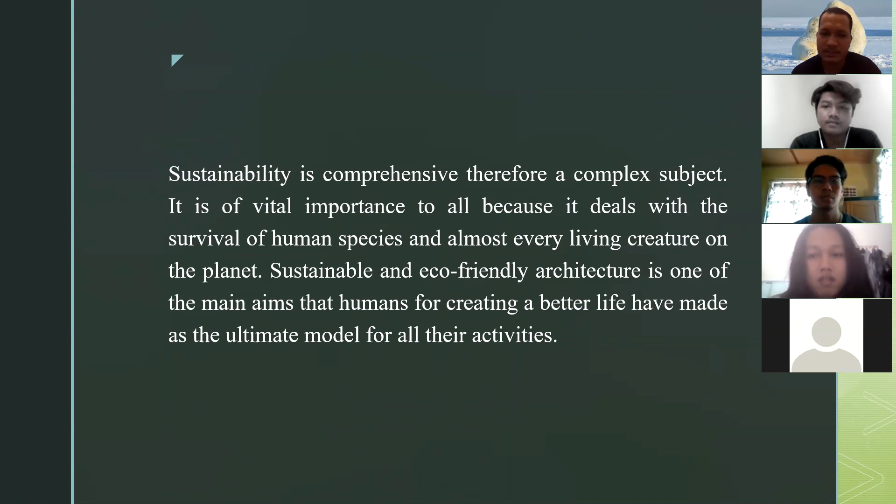Green architecture defines an understanding of environment-friendly architecture. First, ventilation system designed for efficient heating and cooling. Second, energy efficient lighting and appliances. Third, water-saving plumbing fixtures. Fourth, landscape plan to maximize passive solar energy. Fifth, minimal harm to the natural habitat.

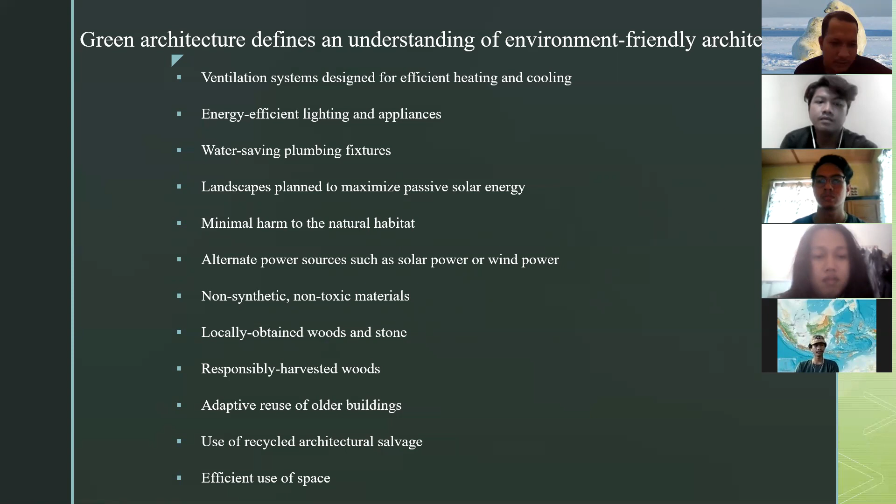Next, alternate power sources such as solar power or wind power. Next, non-toxic material. Next, locally obtained wood and stone. Next, responsibly harvested wood. Next, adaptive reuse of older buildings. Next, use of recycled architectural salvage. Next, efficient use of space.

In order to achieve the stipulated aim, the study presented in this paper takes the following steps. Number 1, general overview on applying green architecture as a concept of sustainability. Number 2, defining considerations for green building. Number 3, defining the benefits of applying criteria for green building strategies that could maximize energy efficiency and indoor air quality. Number 4, describe case study potential in terms of green building aspects.

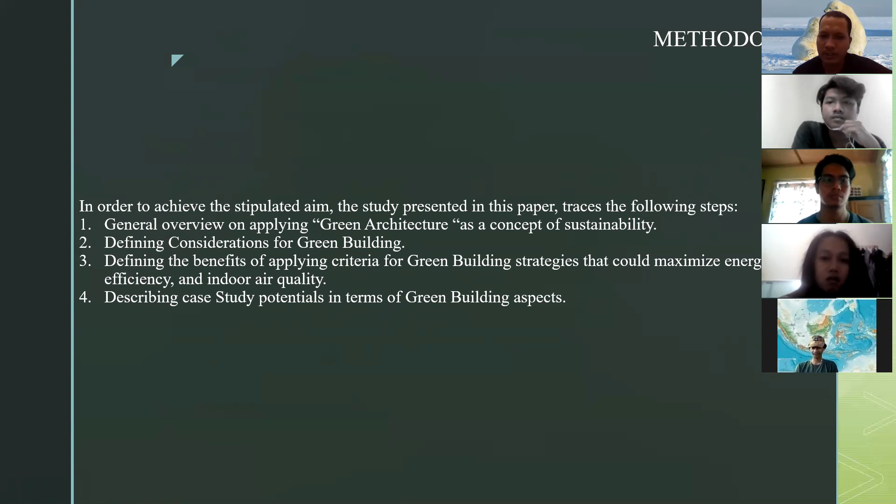The next one is the consideration of green buildings. Basically, in green building itself, it is also necessary to consider several aspects. There are four of these aspects discussed in the paper: site development, material selection and minimization, energy efficiency, and indoor air quality.

For the first one, consideration of the location, it's very necessary to reduce the negative impact on the natural environment around the building site. When the building maximizes natural lighting and ventilation, it can reduce the use of artificial lighting and ventilation, which can have a negative impact on the surrounding building.

The second is selection and saving of material, which aims to reduce adverse impacts on the environment, such as waste pollution from extensive development. The third is designing with the aim of saving energy, in order to increase workspace efficiency and reduce operating costs. The last thing is the need to pay attention to the level of indoor air quality. This needs to be considered to improve the quality of health and productivity of the building users.

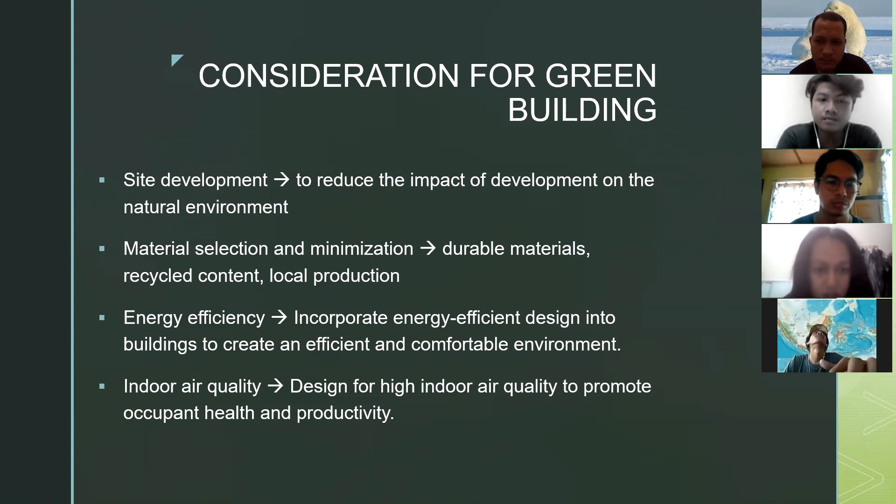Okay, next, I want to explain the principles of green building design.

The green building design process begins with an intimate understanding of the site in all its aspects. An ecological approach to design aims to integrate the system being introduced with ecological functions performed by Mother Nature. And this information supports...

...the use of the USGBC LEED Green Building Rating System, but focuses on principles and strategies rather than specific solutions or technology, which are often site-specific and will vary from project to project.

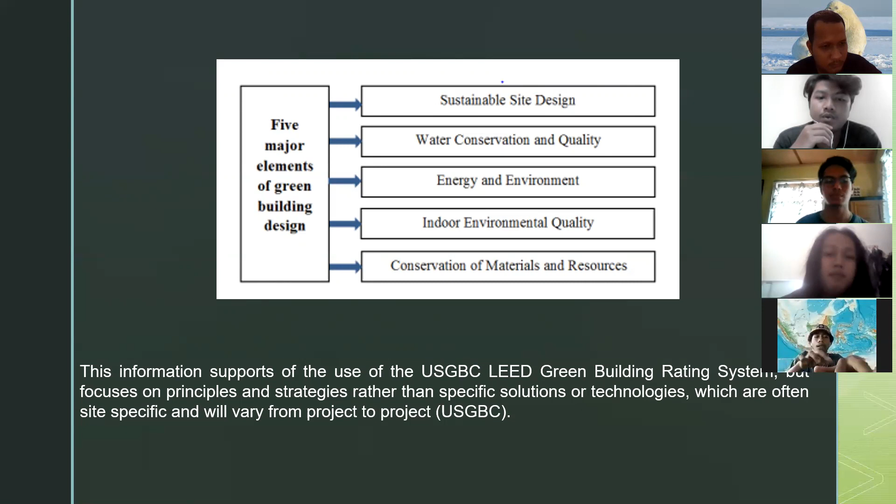Water system. Water, often called the source of life, can be captured, stored, filtered, and reused. It provides valuable resources to be celebrated in the process of green building design. According to Art Ludwig, incredibly...

Natural building involves a range of building systems and materials that place major emphasis on sustainability. One way of achieving sustainability through natural building focuses on durability and minimally processed, plentiful or renewable resources, as well as labor more than technology. The basis of natural building is the need to lessen the environmental impact of building without sacrificing comfort or health.

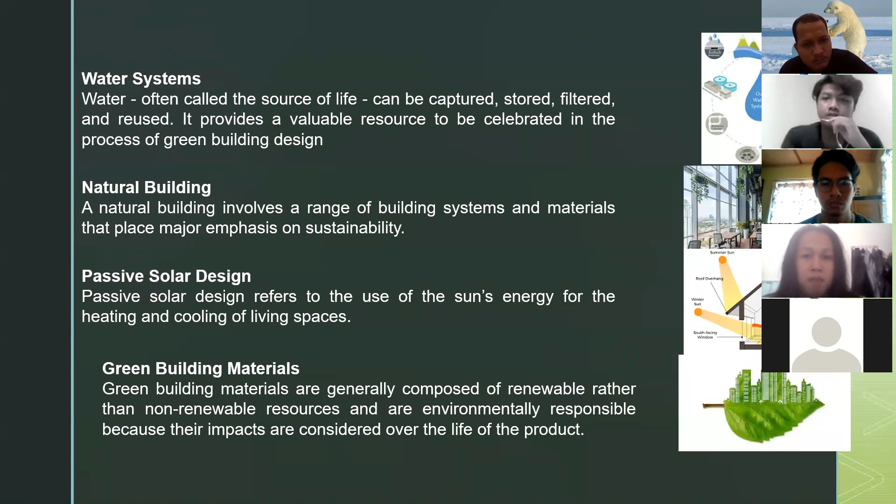Next one is living architecture. The environment, like our bodies, can metabolize nutrients and waste. Living architecture focuses on this process, integrating ecological function into the building to catch water, purify air, and process other nutrients. Living architecture also addresses the documented health benefits associated with being in touch with living systems in the built environment.

For example, green roofs have two types: intensive roof and extensive roof. And the last one is green walls, also known as vertical greenery, which introduces plants onto the building facade. Comparing to green roofs, green walls can cover more exposed hard surface, especially where skyscrapers are the predominant building style.

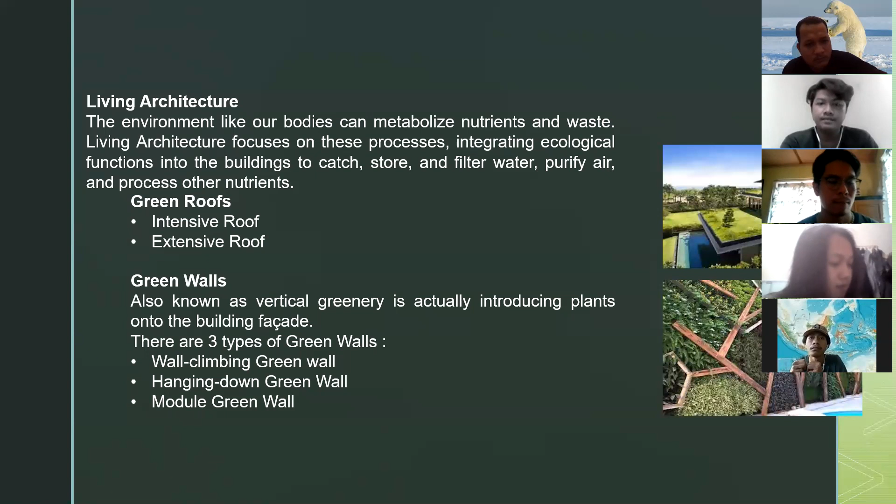Green building benefits. Green building is not a simple development trend. It is an approach to building suited to the demands of its time, whose relevance and importance will only continue to increase.

The first one, comfort: providing natural openings in buildings. Because a well-designed passive solar home or building is highly energy efficient, it's free of drafts.

The second, economy: economy saves money. If addressed at the design stage, passive solar construction doesn't have to cost more than conventional construction.

Third, aesthetic: make the interior more attractive. Passive solar can have a conventional appearance on the outside, and passive solar features make the inside bright and visually appealing.

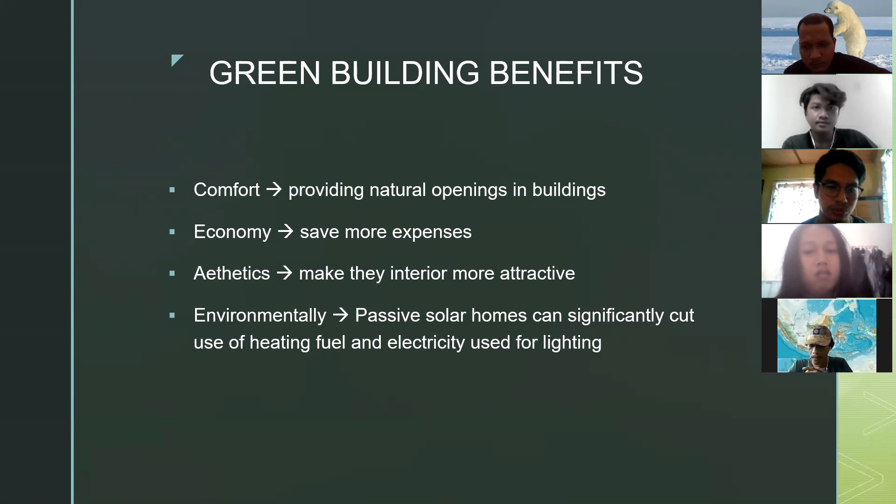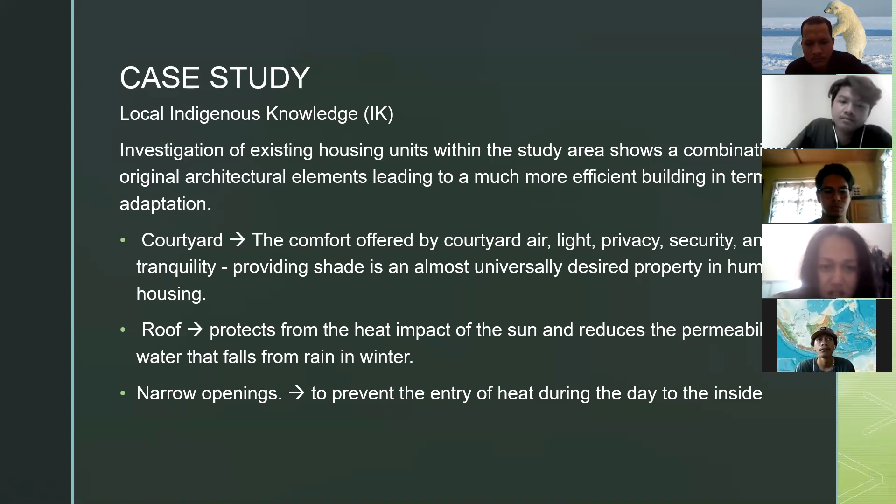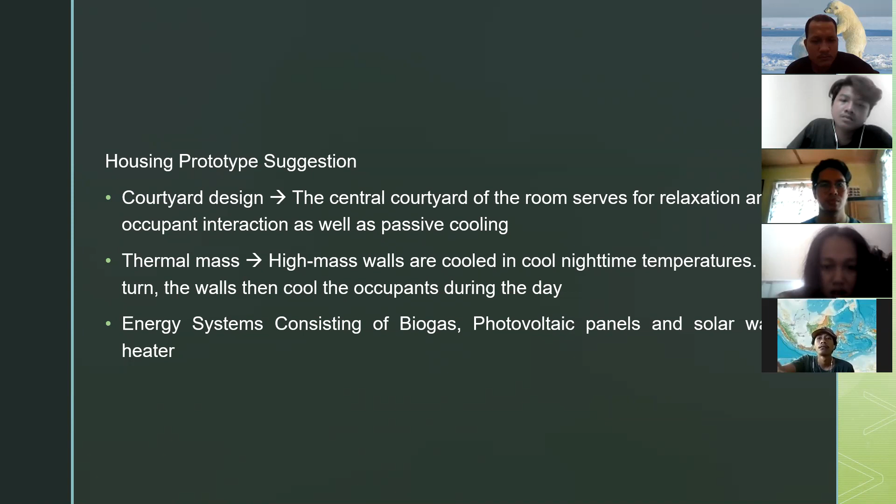Housing prototype suggestion: the study produced a prototype referred to as the typical housing prototype. In the courtyard design, the central courtyard of the rooms serves for relaxation and occupant interaction, as well as passive cooling and thermal mass. The high mass walls are cooled in the cool night time temperature, and in turn the walls cool the occupants during the day. An energy system consists of biogas, photovoltaic panels, and a solar water heater.

And now, the conclusion: Green architecture is an architectural concept that seeks to have a positive influence on nature and the human environment, and to produce a better and healthier place, which is done by utilizing energy sources and natural resources efficiently and optimally, creating a more comfortable and diverse environment. The forms of material and building have been explained on this occasion. Okay, thank you for the attention.